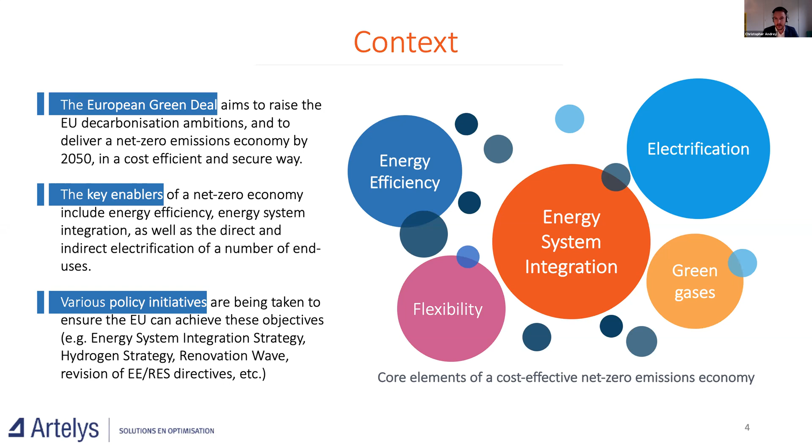In terms of background, I think we have covered via Mr. Bottoni's introduction the key points regarding the context. What we aim at doing with this study is to pursue three objectives: first, to explore the potential of further integrating Europe's energy system in an efficient way to reach carbon neutrality; to assess in this context the role of cogeneration, building on the long-term decarbonization strategy published by the European Commission; and finally to provide recommendations on how to capture these benefits in terms of policymaking and modeling when designing new scenarios for the future.

Two quick words on Artelys and who we are. We are a consulting and software edition company, specialized in energy system modeling and decision support. To carry out this assignment on behalf of Cogen Europe, we have used the model called Artelys Crystal Supergrid, with European-wide integrated gas, heat and electricity scenarios that capture the key aspects of the energy transition, in particular sector integration and the links between electricity and heat sectors for this study.

In terms of content, we'll have two separate parts of the presentation. The first focuses on a number of CHP applications. Here we have looked at the microeconomics of different use cases, comparing the performance in terms of costs of various portfolios of technologies in different cases with different heat demand profiles, different technologies, different energy sources, and we have repeated this analysis for different countries.

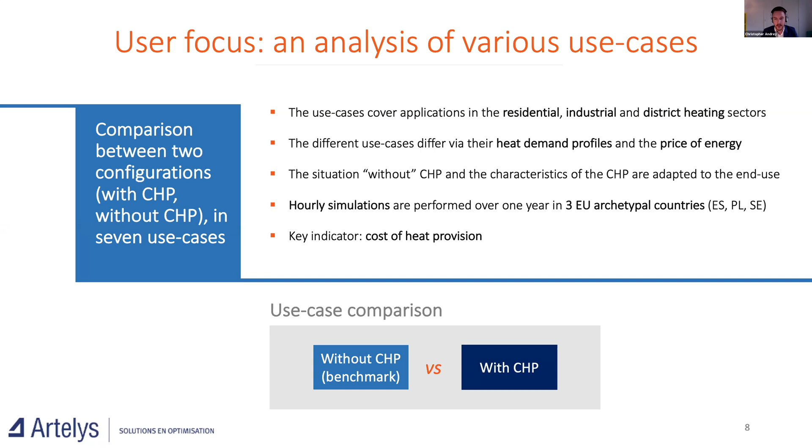So for each use case, we have compared a situation without CHP that we have called the benchmark to a situation with CHP. We have done that for 7 different configurations. I will not go through all the details of this slide, but what is important to see is that we have different types of applications and different technologies - fuel cells, gas engines, gas turbines, combined with different levels of heat storage for different temperature levels in industry, in different applications, also in residential, hospitals, or district heating. So for all these 7 use cases, we have designed a benchmark that is an alternative portfolio of technologies without CHP, and then we compare the cost of meeting the demand for heat in both these systems.

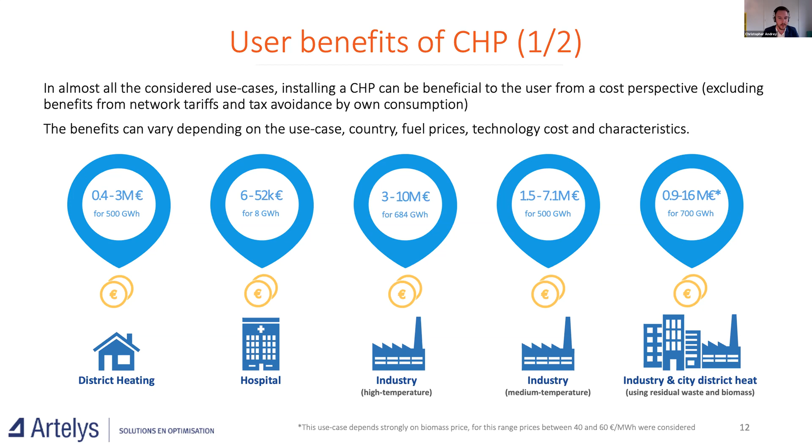Just a word before moving to the second part: as I mentioned, the benefits shown on the previous slide are system level benefits that do not include the additional benefits end users can capture from avoided taxes, levies, and network tariffs. If we consider the entire consumer bill, CHP can become even more competitive than alternative technologies, and in more use cases. For example, fuel cells are found to be competitive in the residential sector from a final user point of view, particularly in countries that face high electricity prices in wintertime or a high level of taxes and tariffs.

Now that we have seen that CHPs bring benefit to end users, let's see how this translates in terms of system, and in particular in terms of investment, CO2 emissions, and total costs.

To undertake this assessment at the system level, we first began by defining some scenarios. We based the analysis on scenarios inspired by the 1.5 tech scenario of the long-term strategy of the European Commission. We looked at different sectors in terms of heating demand and assessed the potential for CHPs in these sectors. We calculated what the 1.5 tech scenario of the European Commission has provided for CHP, and what is the additional potential where we think CHPs could compete. Once we identified the potential at the maximum heat demand that can be covered by CHPs, we ran an economic optimization.

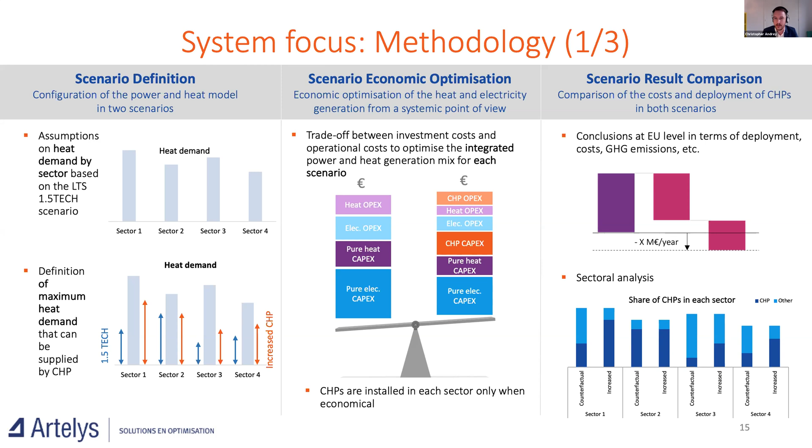To perform this, we have used a pan-European heat and power model, our own model, Artelys Crystal Supergrid. We used an hourly time resolution to ensure we can capture the synergies between the periods where you need both heating and electricity from thermal technologies, and to see the role of cogeneration in providing both services at the same time.

The electricity generation assets are aggregated by country, and sometimes by efficiency classes. The consumption is modeled by sector, with advanced modeling also of flexibility solutions, especially in the electricity system, such as electric vehicles, electricity storage, but also heat storage, as I've shown previously.

The model enforces the balance between supply and demand for electricity and heat for each hour in each of the countries. The model is then able to determine the optimal deployment of CHPs or competing technologies in each of the countries.

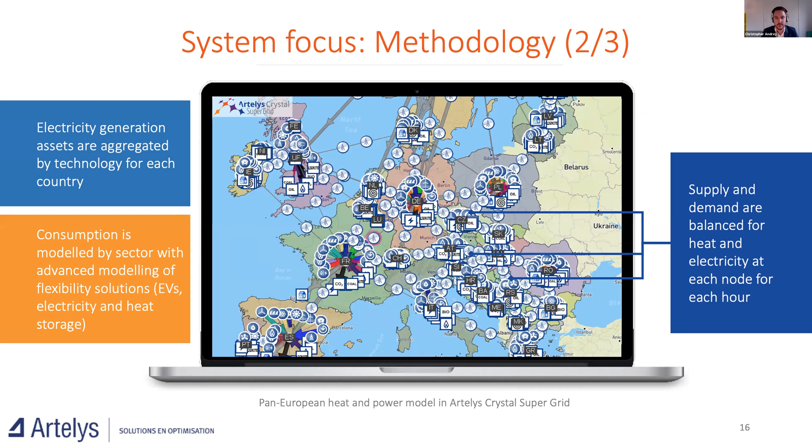The rest of the electricity generation mix—biomass, biogas, natural gas, hydrogen—is also optimized. We performed this optimization with an hourly time resolution, which we believe is very important in order to capture the synergies and interlinkages that CHP allows between the heating and electricity sectors, at country level granularity. The geographical scope was EU27, the Balkans, Switzerland, Norway, and the UK.

We have taken a number of technical constraints into account, which I don't want to go into in too much detail. The final two points are interesting in order to take into account the reduction of grid losses that come with the deployment of CHP, and the avoidance of network reinforcements. We have implicitly considered both these benefits of CHPs by adapting efficiencies and capital costs of CHP technologies.

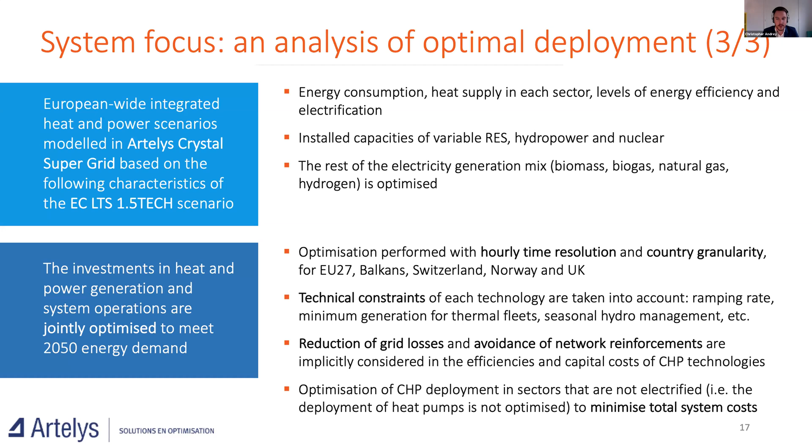In terms of scenarios, we have performed this analysis from two starting points. As mentioned, the 1.5 tech scenario, which we denote 1.5 tech star—this scenario, because it's not strictly the official 1.5 tech scenario, represents our understanding of it. We use this as the central scenario in the analysis.

We also have a scenario variant called Integrated Energy Systems, IES, where we have included higher shares of green gases, including power-to-X and hydrogen. In both cases, we have repeated the same analysis, doing the economic optimization of CHP deployment, and both result in more CHP installed compared to the 1.5 tech scenario, more efficient use of energy, and reduced energy costs.

So in total, we have four scenarios considered in this study: one baseline of the 1.5 tech scenario, and one 1.5 tech scenario with optimal CHP deployment, and the same for the IES scenario—one baseline, and one optimized CHP deployment scenario.

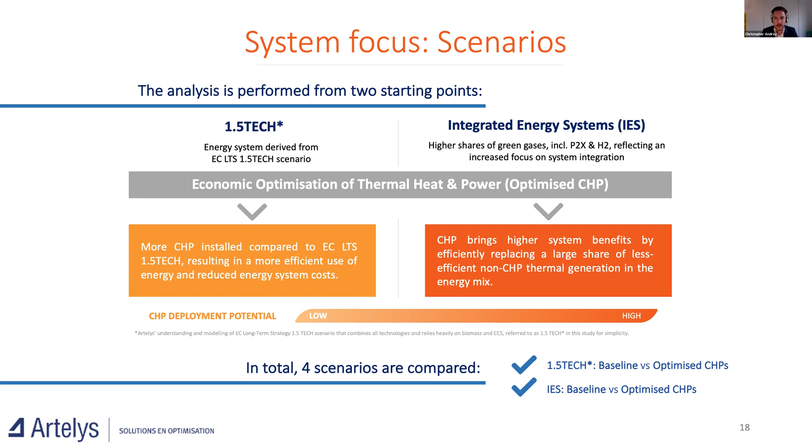A few words on the 1.5 tech scenario before jumping into the results. As I mentioned, the 1.5 tech scenario relies on publicly available assumptions related to these scenarios and pathways shown in the long-term strategy of the European Commission.

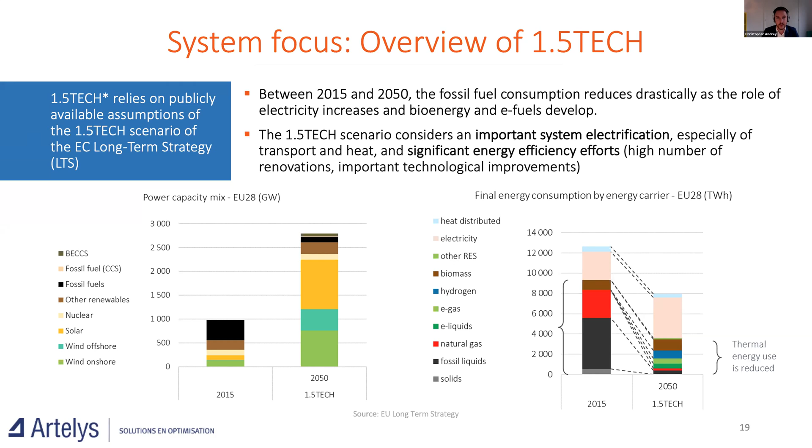In terms of heating, we have looked at 4 different sectors that are interconnected with the electricity system: district heating for industries, district heating for buildings, on-site heat generation for industry, and on-site heat generation in buildings, whether collective or individual heat. The share of each energy source is an input from the 1.5 tech scenario.

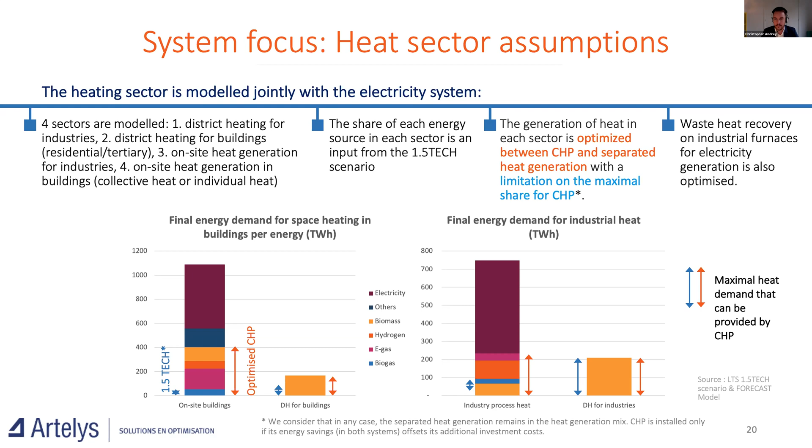The integrated energy system scenario is defined as a variant of the 1.5 tech scenario, where we increase the share of thermal generation, biomass, biogas, and natural gas with CCS. We have a steady nuclear capacity installation rate comparable to the current nuclear increase rate, resulting in a capacity of 50 gigawatts in 2050 compared with 120 gigawatts in the EU 1.5 tech scenario.

We have a larger share of biogas-based heat demand in district heating for buildings, also in line with increased biogas-based power generation. But the demand levels, electrification rates, and share of variable renewables are maintained as in the 1.5 tech scenario. Importantly, in this IES scenario variant, we also meet the net zero emissions objectives.

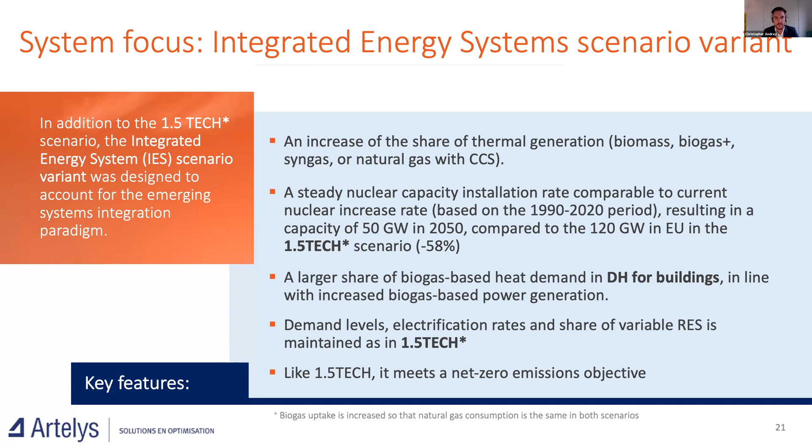In terms of energy cost, we see a reduction of total energy cost of 4 to 8 billion euros per year at the European level, meaning that the additional investment in CHP is more than offset by savings in fuel costs and CO2 emissions. We have primary energy savings across the energy system of 150 to 220 terawatt hours per year, and a reduction of CO2 emissions by 4 to 5 megatons CO2. This is also due to the fact that even though we are in a carbon neutral scenario, we still have natural gas being used with CCS, but due to the efficiency of CCS, we still have emissions.

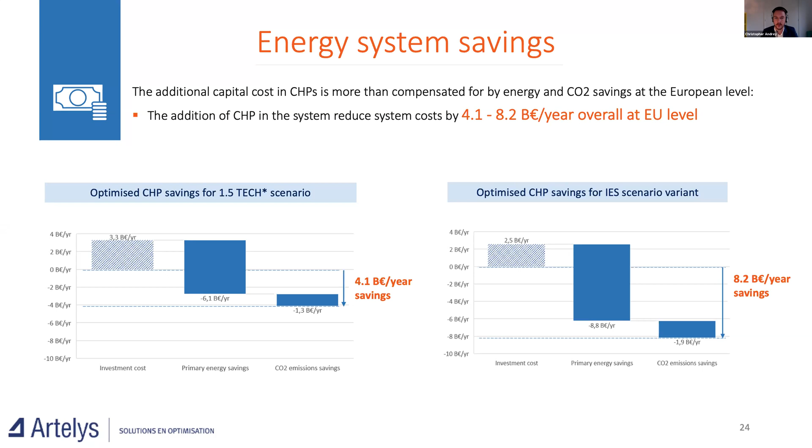Furthermore, there are CO2 emissions being saved, and using the CO2 cost in these scenarios, this also results in benefits from a systems point of view. So again, between 4 for the 1.5 TECH scenario and 8 in the IES scenario variant, billion euro savings per year at EU level.

In terms of primary energy savings, we see that increasing the share of CHPs in all sectors leads to a reduction of primary energy consumption at system level. This is due to the reduction of electricity generation from natural gas-fired units, thanks to better use of fuels. The savings are found to be around 150 to 220 terawatt hours per year, depending on the scenario considered.

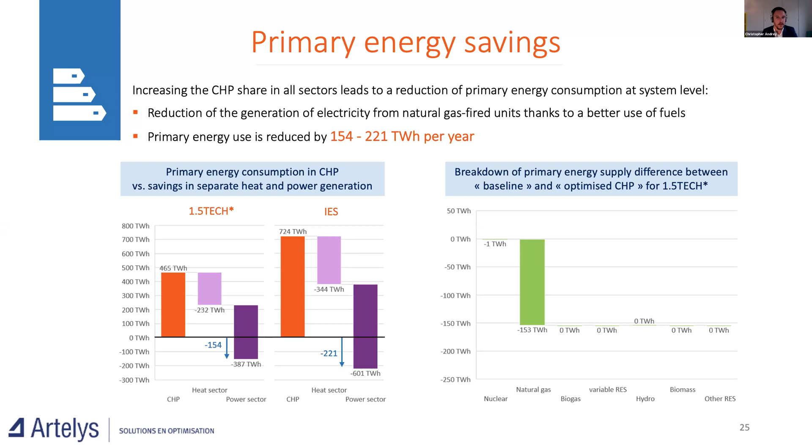Likewise, in the IES scenario variant, you have increased consumption in the CHP sector due to CHP deployment, but this is more than offset thanks to the higher efficiency of CHPs in the heat and power sectors. On the right-hand side, I've shown the fuels being saved due to the use of CHPs. In most cases, natural gas is the fuel we save thanks to the introduction of CHPs, which will also be important in terms of CO2 emissions reduction.

Let's talk about CO2 emission savings. As mentioned in the introduction of the results section, between 3.8 and 5.5 megatons of CO2 savings can be generated annually thanks to the reduced use of natural gas in CCS plants, where we assume a 90% CO2 capture rate.

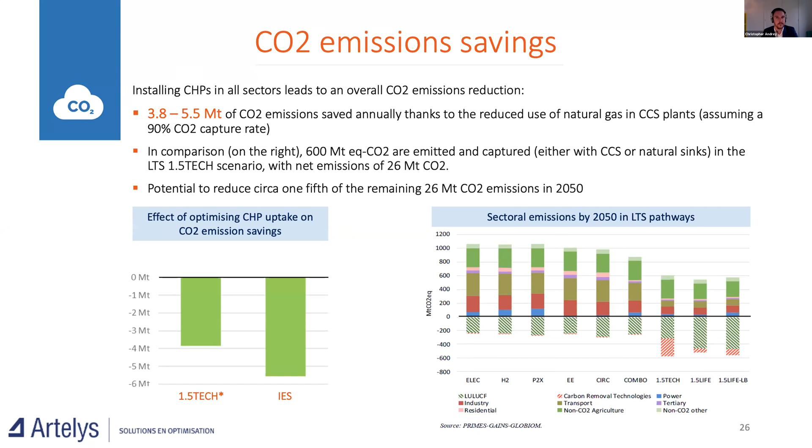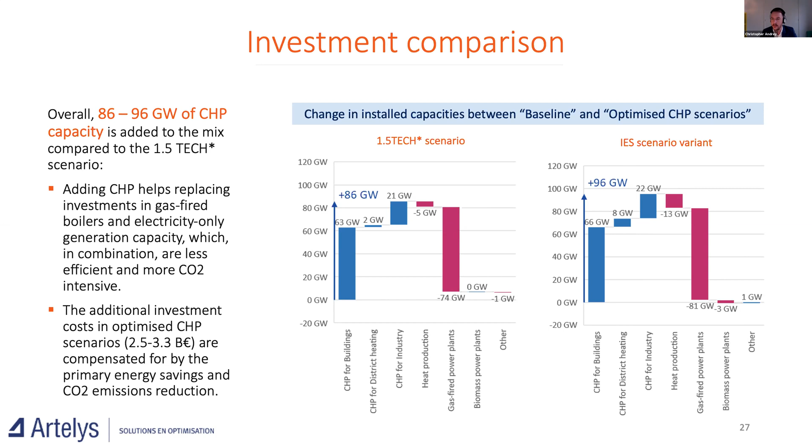So what does it mean in terms of heat production by sector? Here I've shown the results for the different sectors we are targeting in this study: on-site buildings, industry, district heating for buildings, and industrial district heating. On the right-hand side, this graph shows, of the total heat demand, what share is being provided and supplied by CHPs.

For each of the sectors, you have two columns: the 1.5 TECH scenario directly from the Commission, and the optimized CHP deployment within the context of the 1.5 TECH scenario. We see that the orange part, linked to CHPs, is increasing in all sectors in the optimal CHP deployment scenario, giving us 236 additional terawatt hours of heat covered by CHP.

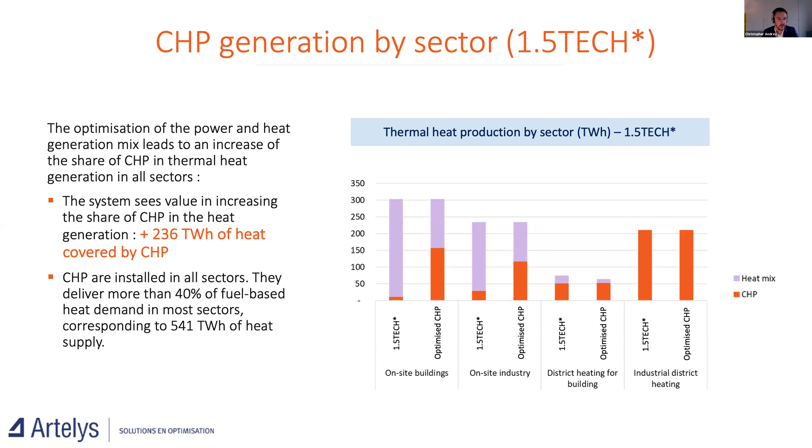We can repeat the same analysis in the IES scenario variant, and here the results are even clearer: we have an increasing share of thermal heat production covered by CHPs in all sectors, reaching more than 80% in industry and 70% in buildings.

So CHP operations combine flexibility and efficiency, as also mentioned in the introduction. In the future, we'll have a lot of renewables in the system. We'll need flexibility on different timescales, and a system that adapts dynamically to renewable generation. So I have a few slides showing how CHPs interact with other technologies, first from a heating perspective, and then from an electricity system perspective.

Here you have a typical thermosensitive heat demand for buildings: the solid blue line is demand, and the contribution of CHPs and boilers is shown in different colors, orange being CHPs and purple being boilers. During the winter time, when demand is high and electricity prices are high, CHPs ramp up to cover the high demand and capture the benefits linked with higher electricity prices.

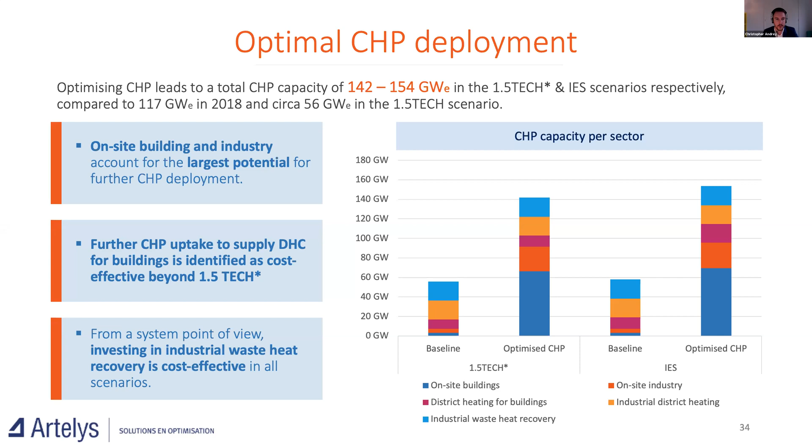So here we have the CHP capacity per sector, both for the 1.5 TECH scenario and the IES scenario variant, where you see two columns, one for the baseline and one for the scenario where we have optimized the CHP uptake. We see that in all sectors we have an increase of the deployment of CHPs in the optimal CHP deployment scenarios.

In terms of the share of heat being delivered by CHP, we see that in all sectors in the EU - buildings, industry and cities - we have a large share of the total heat being covered by CHPs. In terms of total heat, we have 26% in buildings. When we look at the share of thermal heat, we reach 52%. In industries and SMEs, again we have around 26% of total heat, but that amounts to 84% of thermal heat in this sector. And finally, in cities, we have about 40% of total heat that can be supplied by CHPs, but in terms of thermal heat production, this amounts to about 91%.

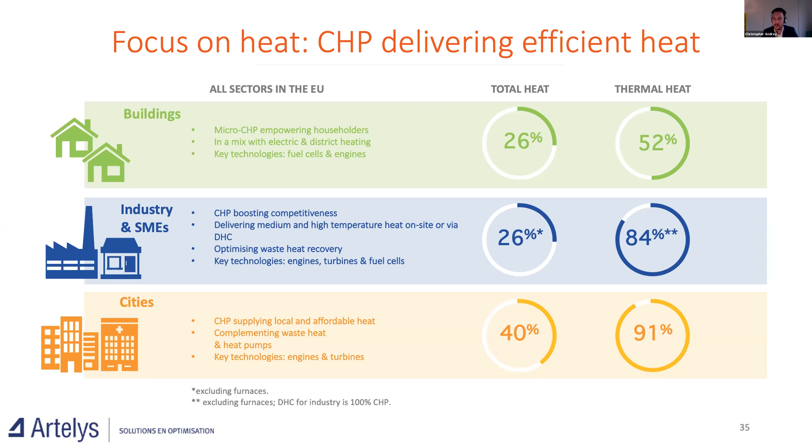So to recap on the key figures, we have seen that CHP can be a future-proof solution for 2050, since it has a number of different benefits. It's cost-effective. It brings benefits to all users in different sectors, as we have seen in the first user focus presentation of the results. It can reduce carbon emissions. It enables system integration, so it's a dynamic interlinkage between the heat, gas, and electricity systems. And it's an energy efficient solution that can be used to provide flexibility and to enhance the reliability of the energy system.

In terms of primary energy savings, as we mentioned, we are between 154 and 221 terawatt hours, between 3.8 and 5.5 megatons of avoided CO2 emissions, and savings about 4 to 8 billion euros annually.

So I will now provide key conclusions and recommendations in terms of modeling, and then I'll leave the floor for questions and comments. So as mentioned, both from the end user perspective and the systems perspective, we have found that CHP can be an efficient enabler for reaching 2050 carbon neutrality in a cost-effective way.

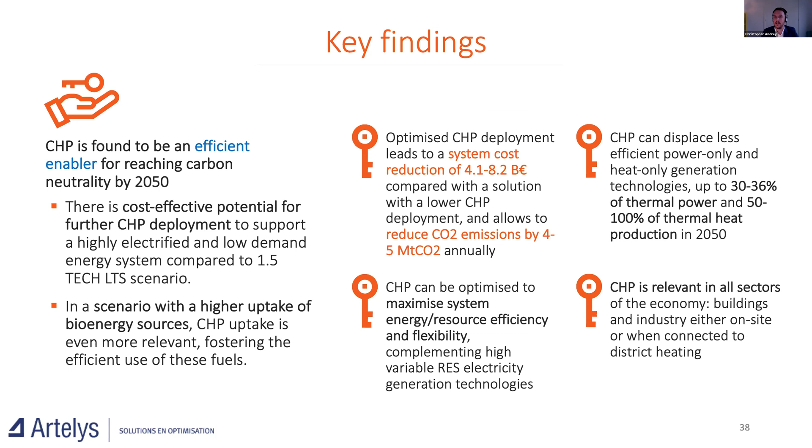Of course, for this potential to materialize, we have to ensure that there are no barriers that prevent CHPs and, in general, the most cost competitive solutions, from deploying.

So here we see that the benefits of CHP are quite wide in terms of the origin of these savings. They allow us to save some CO2 emissions, some investments in other technologies, and some operational costs. So the market structure and the regulatory regime at the national and European levels should allow CHP to capture all the value that they bring to the heat and power system, in terms also of avoided network costs and generation capacity. Currently, the revenues of CHP can be scattered across different markets, some being country-specific.

The taxes and the tariffs may not always provide the appropriate price signals, so we have to ensure that they do, in order that the most cost-effective solution from a system point of view integrates the system. And in many cases, the value that CHP brings in terms of avoidance of electricity network reinforcement cannot be captured by the CHP owner. So this is one barrier that has been identified and should be worked on. I think Hans will also provide some recommendations on this.

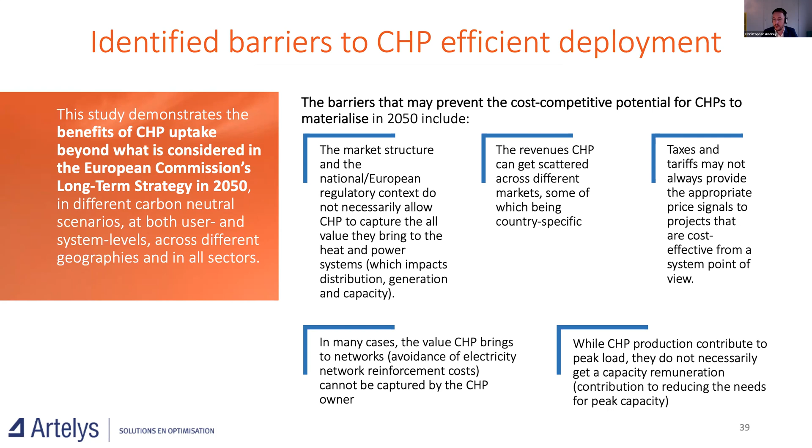And finally, in terms of recommendations on modeling, we've seen that we have been able to identify a number of applications and deployment of CHPs that go beyond what has been considered in the European Commission scenarios. And we think that in order to identify these potentials, it is essential that we use models that jointly consider the power system, the heat system, and the gas also, with an adequate level of detail in terms of representation of the heating demand, in particular for different temperatures and different technologies that can provide heating for different temperature levels.

The CHP operation should be modeled to complement variable renewable generation by adopting cost-efficient operational management of the system. The market model that we have used in this study, Artelys Crystal Supergrid or METIS, is the configuration that we have delivered to the European Commission.

Could be used for this purpose. The heat consumption should be modeled, as I mentioned previously, with sufficient detail in each country by heat sector - buildings, industry, district heating - and with different temperature levels. This is important in order to represent the competition between the different alternative technology packages. And again, the diversity of heat supply solutions should be accounted for in each sector.

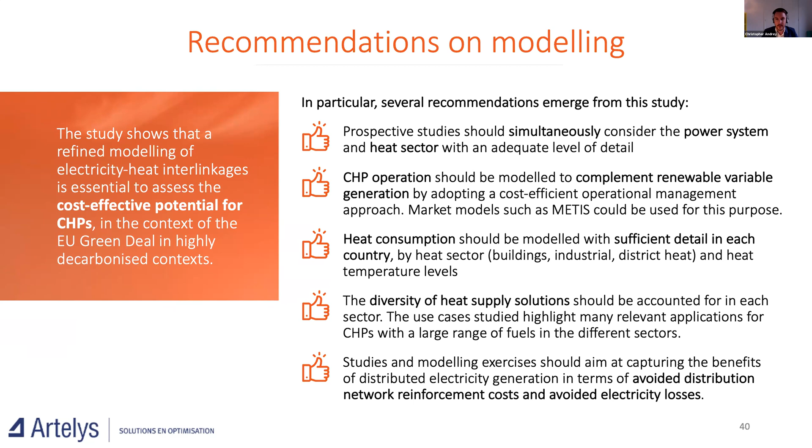So with that, I thank you very much for your attention, and happy to take some questions together with my colleagues that should be on the call with me.

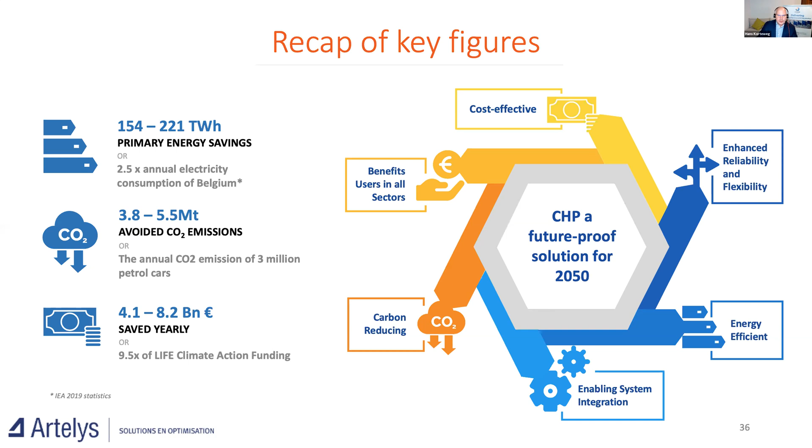Okay, so based on these results, how do you expect the business models for various CHP applications to change by 2050?

So here we see one important result: deployment of CHPs is economic in all the end uses and sectors we considered in the system level analysis. There will be some changes in how CHPs are operated. To complement renewables, we have not assumed a base load way of operating CHPs. In a number of cases, a virtuous way of operating CHPs is to complement renewables, and in other sectors, especially industry, other ways of operating CHP will still be relevant.

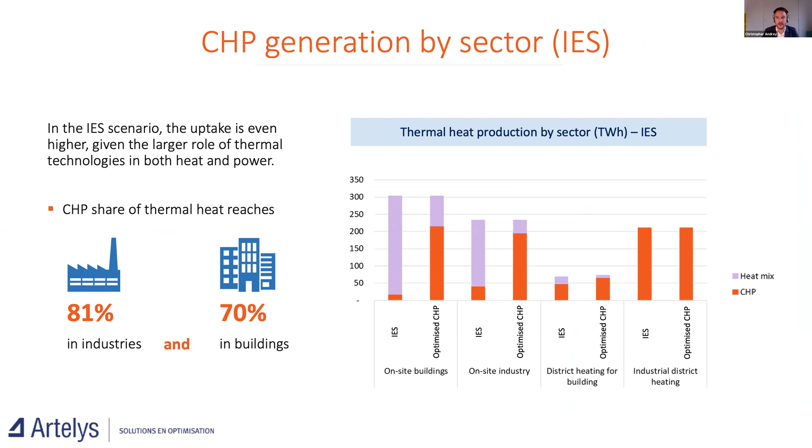So in all these scenarios, the production of CHPs adapts dynamically to the situation in terms of electricity demand. The entire scenario, the 1.5 tech scenario or the IES scenario, is dimensioned so as to produce electricity to supply the final electricity demand, but also the demand for e-gases.

So there will be periods where you have excess electricity compared to final demand. During these periods, electrolyzers run, and storage can then supply green gases back into CHPs. Perhaps one important point is that the dispatch figures I've shown today are only for one country. It might be the case that in a given country you still need CHP running during high RES production to supply a neighboring country and avoid more carbon-intensive or expensive fuels being used there.

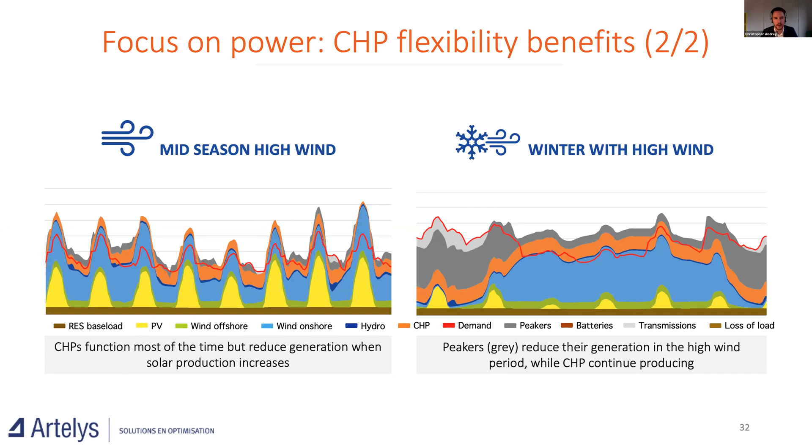Okay, thank you, Christopher. A technical question regarding your scenarios, calculations and modeling: are climate neutral fuels for CHP in 2050 just gases, or do you count on other climate neutral liquids as well, like biofuels, liquid e-fuels, etc.?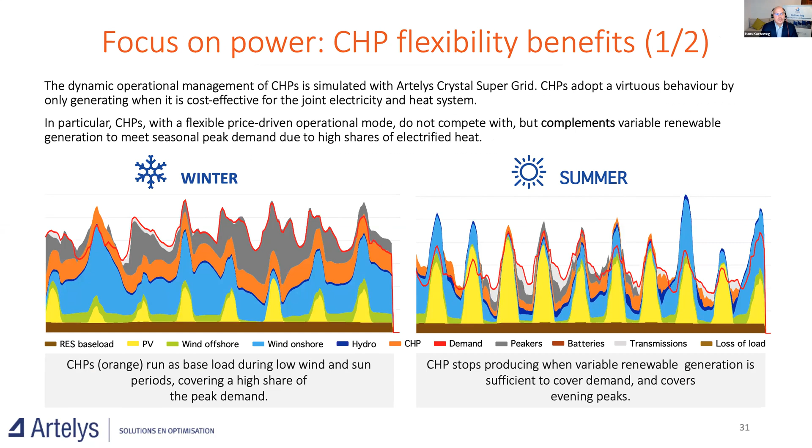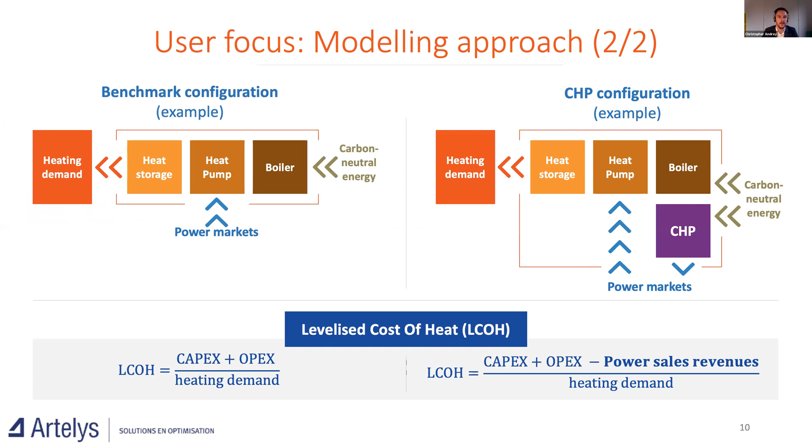Okay, thank you. I think maybe one more question. Let's see. How does CHP complement end use and system level electrification? Do you see CHP and heat pumps competing or complementing each other?

So in this study, it's pretty clear that they complement each other. What we've looked at is in the 1.5 TECH scenario, there's a demand for heating, and we've separated it into different levels of heating temperature. There's a part of this heat that can be delivered by heat pumps, and part that cannot be electrified in a direct way. So it's this part of the heating demand that we've analyzed in more detail, where we looked at the trade-off between investing in CHP and alternative technologies.

And the outcome of the analysis is that in order to provide that heat which cannot be directly electrified, CHPs are the most cost-efficient technology available, thus leading to the higher deployment rates that we see in our results compared to scenarios based directly on the 1.5 TECH scenario.

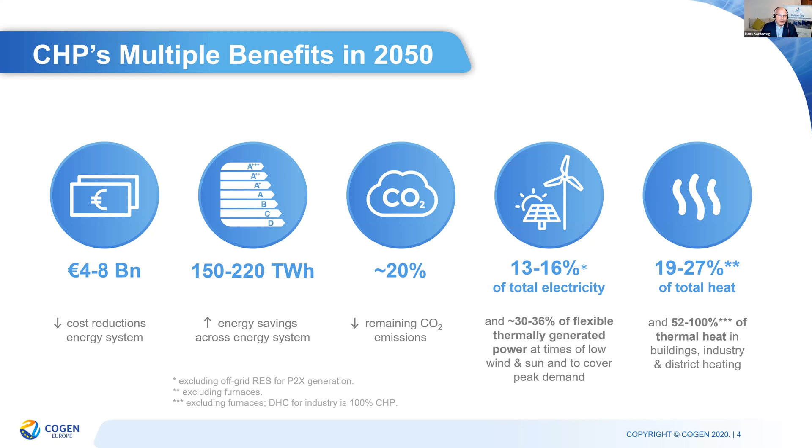In terms of heat, the study also shows that in 2050 CHP brings end user benefits and is well suited for all sectors, including the domestic sector, where we're talking about 26% of total heat and 52% of thermal heat. Looking at industry and SMEs, 26% of total heat and 84% of thermal heat. So these are significant figures.

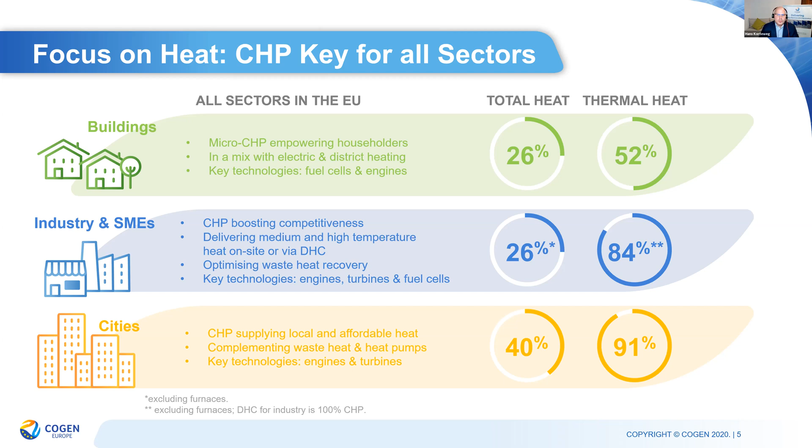Another key learning is that the study demonstrates the critical role of cogeneration to support a highly renewable and electrified system. CHP operations can be optimized to reliably and flexibly respond to power market prices and heat demand, but CHP does not compete, it complements variable renewable electricity generation. As such, CHP is a flexible solution alongside batteries, hydro storage, and demand-side management to meet electrical system needs. It's also important to understand that CHP's short-term flexibility will vary by application, heat or power driven.

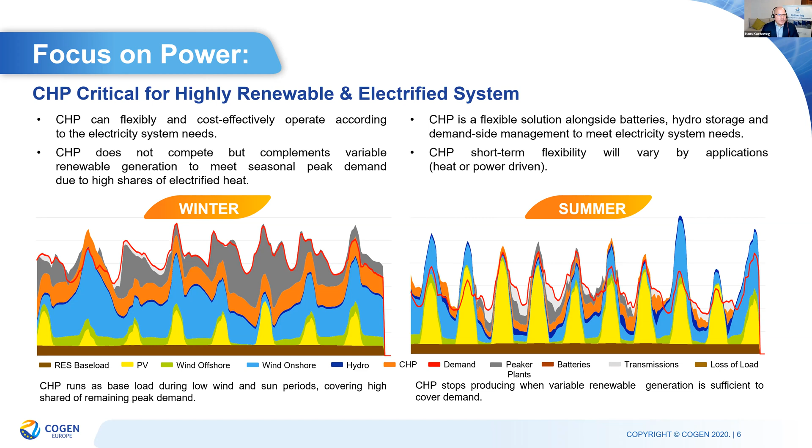There are significant cost savings for CHP users. Obviously it depends on where you are geographically, weather, resources available, etc. But you can see savings for district heating, using a hospital as an example, in industry regarding high temperature and medium temperature industry, and even including industry and city district heat. You have ranges between 0.4 or 400,000 and 3 million from a district heating perspective, all the way up to 16 million in some cases.

Examples include industry high temperature heat, such as a chemical plant or an alumina plant. In terms of medium temperature industry, we're talking about the food and drink industry. There are many different applications.

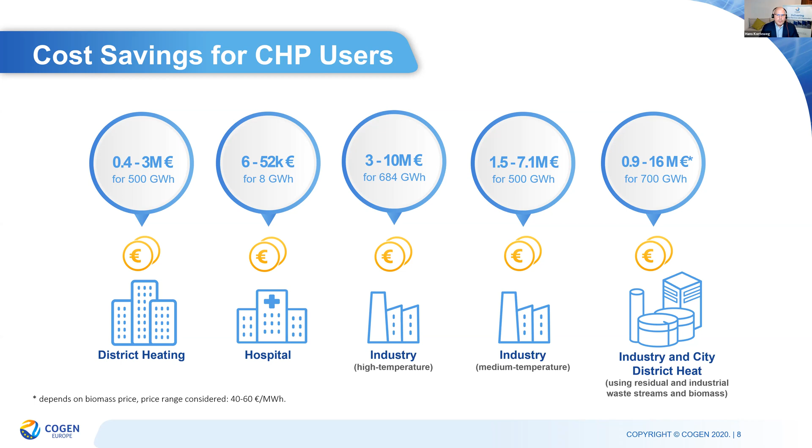CHP is a future-proof solution for 2050, and it brings key benefits to all sectors. CHP is resource efficient and energy efficient, avoiding the waste of valuable resources. CHP helps reduce remaining CO2 in a carbon neutral energy system. CHP is a cost-saving solution. CHP is also critical for a highly renewable and electrified energy system. CHP also enables the integration of the energy system by linking electricity, heat, and gas at a local level and providing energy when and where needed.

My next slide will provide that illustration. Finally, CHP brings end user key benefits and is well suited for all sectors in terms of buildings, commercial, district heating, and industrial. Here's a very good example of system integration. CHP enables an integrated energy system by linking things like electricity, heat, and gas at a local level and provides energy when and where needed.

CHP will enhance the reliability but also the flexibility of a renewable-based, highly electrified, and integrated energy system. As we see it as the most energy efficient solution among different thermal energy generators, CHP not only reduces the use of fossil fuels but is the best solution to support a system based on renewable energy and contributes to system resilience. It also brings together the heat, electricity, and gas networks to ensure the most efficient energy conversion among them. That's why we see CHP as a backbone to this future energy system.

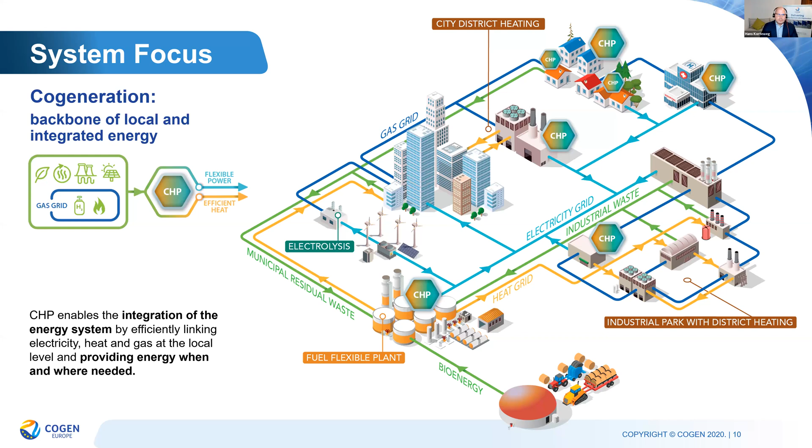Finally, there is an important cost-effective potential for highly efficient cogeneration in the 2050 carbon neutral system. Today, CHP provides 11% of electricity in Europe and 15% of the heat in Europe. We have extrapolated in various EU co-funded studies that the share of electricity can be doubled by 2030 with the right policies in place, and can provide up to 25% of heat in Europe with the right policies and incentives. Looking towards 2050, based on the modeling, we can see that in addition to what is already installed today, there can be an additional 40 gigawatts more installed for CHP in the 2050 system.

That's actually more than two and a half times the capacity that was projected in the Commission's 1.5 tech long-term strategy. 40 gigawatts is not insignificant.

It's the equivalent of 40 nuclear power plants, 1,000 megawatt nuclear power plants. Today in Europe, you already have 107 nuclear power plants, to put things into perspective.

In terms of policy recommendations, in particular for the European Commission, the European Parliament, but also member states, what we're saying is that we need to fully recognize CHP's role in sectoral policy for industry, buildings, and district heating. We need to better account for CHP displacing less efficient and more carbon-intensive marginal generation, today and all the way up into 2050.